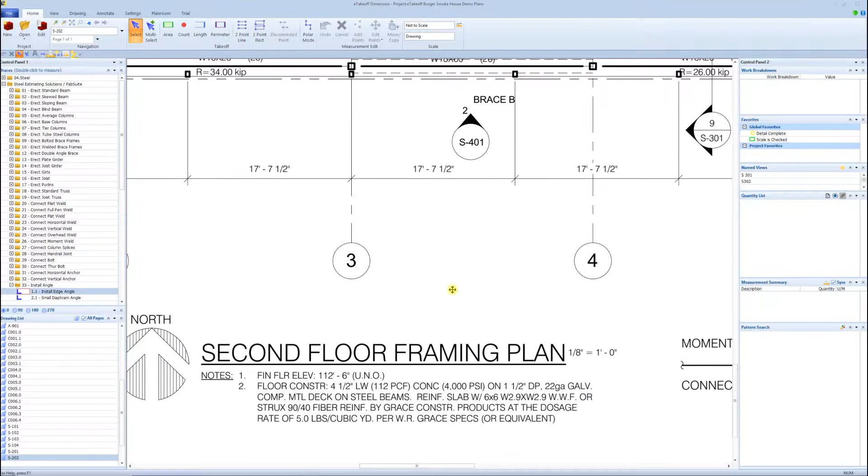In eTakeoff, the way it works in that software is we just zoom in to the bottom to where we see what the scale is. 1/8 inch equals a foot. Then we come up here and we're going to select the scale. 1/8 inch equals a foot. Just hit OK. We'll zoom in a little bit more and we'll grab the measurement tool or the dimension tool.

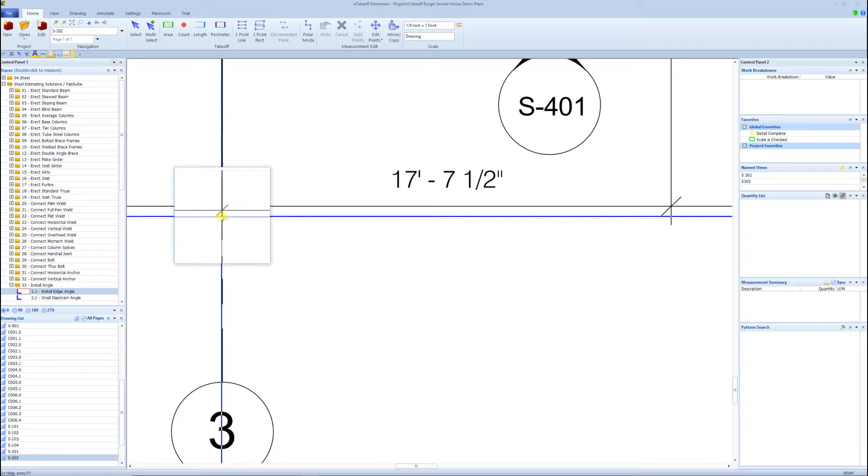On eTakeoff, if I hold the left mouse button down, it will pull up a window, and once that line turns a little yellow, that lets me know I'm right on that point. Then I come to the other point, other grid line. Just select it, so the scale's set at 17 foot 7.5 inches.

Now, just to point out something, in case the scale was wrong, we set it at 1/8 inch equals 1 foot, and it was wrong, there's a way to fix that. Pretty simple. So what I'm going to do is I'm just going to make the scale wrong. And we'll say it's 1/16 equals a foot, just so that will be wrong. And so if the scale that they told us on the plan is 1/8 inch equals 1 foot, and we took that measurement and it was incorrect, all I have to do is come in and do the same process, but I'm going to click calibrate scale.

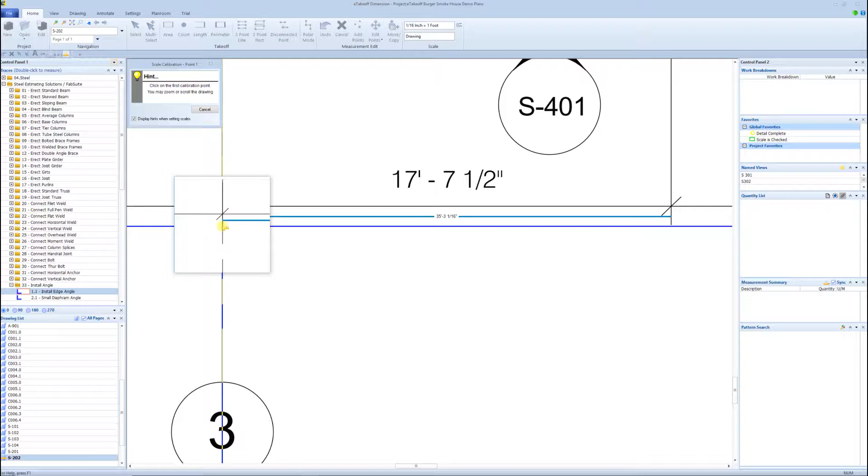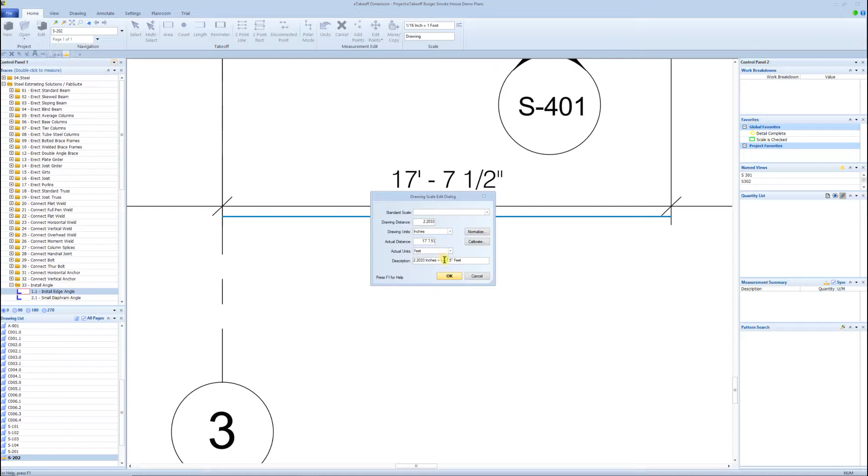Then I've got to do the same thing again. I'll select the point. Make sure I'm on it. And then I have to tell it what the scale is, or the dimension is. 17 foot and 7.5 inches. Hit OK. And now we got it correct again for being 1/8 inch equals a foot.

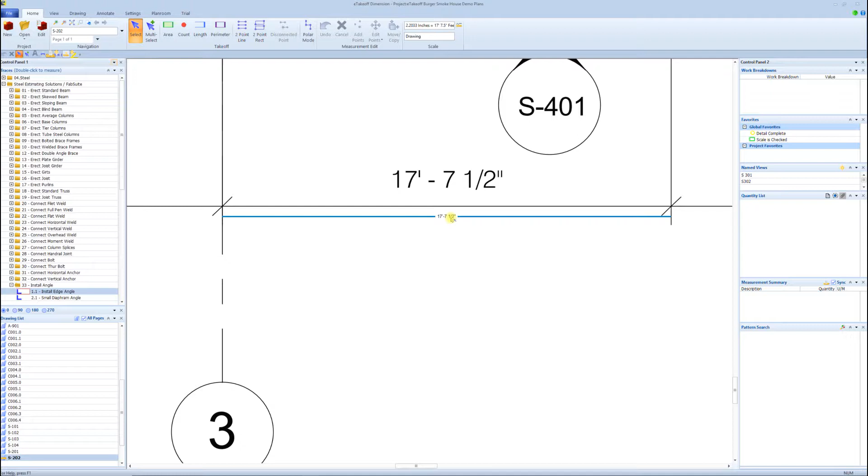So once you set that scale, I put something into place. I had a project where I actually lost some money because I forgot to set the scale on the drawing, which happens if you're not careful. So I came up with a system for myself to make sure I always had the scale set. Very simple. I basically highlight the dimension I took to check the scale on the drawing. And I typically highlight it in green because green means go.

And so once I highlight that in green, now if I zoom full page, when I look at it on my takeoff drawings, I'm going to see that green highlight, so I know that I've checked the scale on that drawing. That way it's a very quick visual to know that I'm ready to do takeoff on this page. And so then, like I say, it's the first step. You go to every plan that you're going to do a takeoff on, and you set the scale on that particular plan.

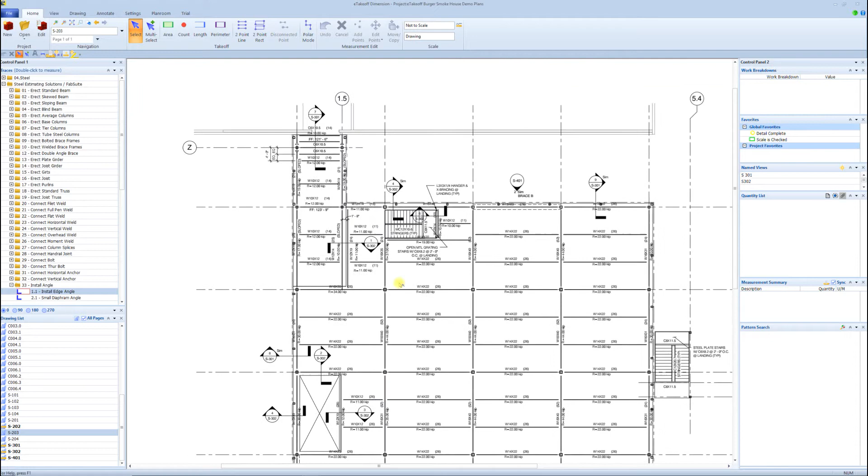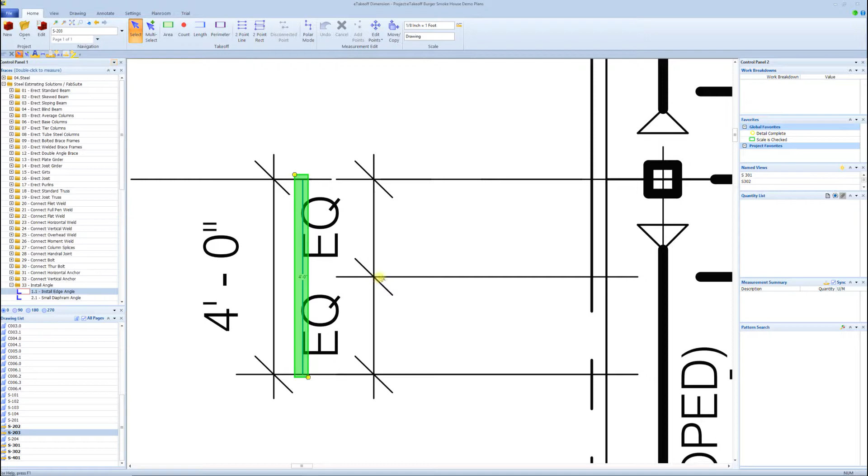This drawing here does not have too many dimensions, which is unfortunate, but that's what they did here. So I'm just going to zoom into the only dimension they have on the plan. And we know it's 1/8 inch equals a foot, so I select that. Grab my dimension tool. And now we see it's correct. The scale is correct, so I go ahead and do my highlight in green. Hit enter, zoom full page, and now we see the dimension set there, and then go to the next drawing.

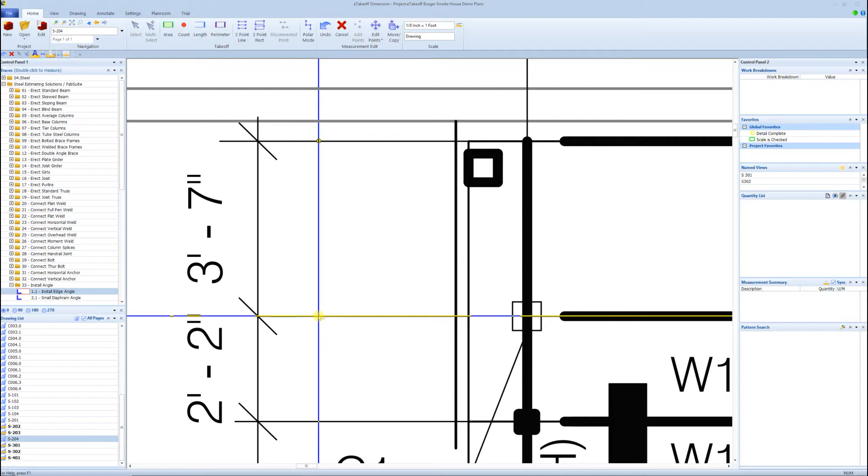Same thing, not too many dimensions on this plan. Select the scale. And the more you zoom in, the better, because if you zoom in further in Takeoff, you'll see that that line highlights right away in yellow. And we're at 3/16, I'll call that close enough. Highlight that dimension in green. Zoom full page, and the scale is set there.

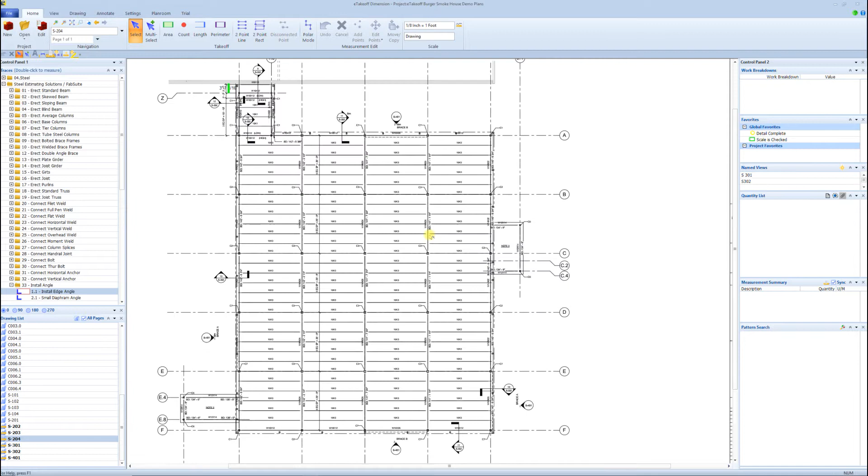And unfortunately, on this drawing here, you don't have that many dimensions, so I have to use that one. That's not ideal, because when I zoom all the way out, I can still see a little green, it's still visible, but it's not where I typically like to do it. We could go and figure out what the dimension is from 2 to 3 and pull that over as well, but in this example, the idea is just to show you how to set the scale on the drawing. So hopefully that simplifies that process for you.